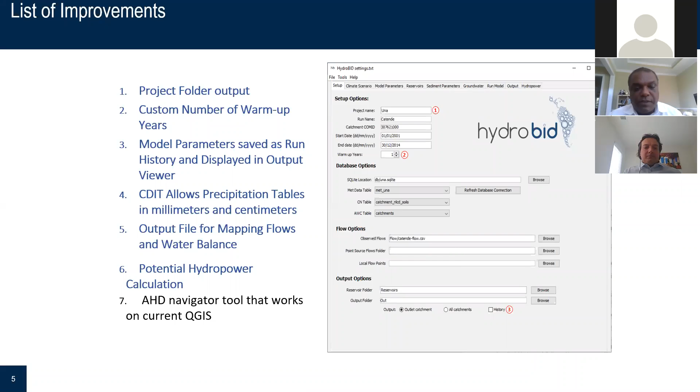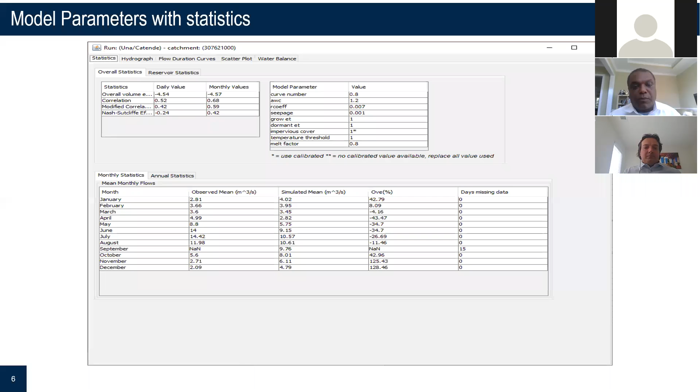The third one is the model parameters that you have run for one output. We didn't have a way to save it before, but now we've developed a method where you can save your parameters and see it with the statistics those parameters produced. So you have your model parameters, the statistics, and the graphs together, with every piece of information saved for you. This is one of the improvements that will help you in calibrating the model and following up on the results and the parameters.

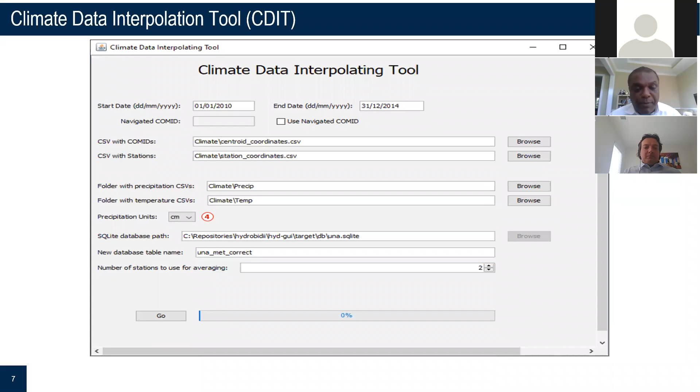The next improvement we did is in climate data interpolation. Remember, you collect your rainfall and temperature data. One of the things we wanted to do is allow different units. Initially, HydroBID forced you to use precipitation only in centimeter units, but now you can choose depending on the data you have. If your data is in millimeters, you can choose millimeters, and internally the model will convert that into centimeters for you. This is a good tool that helps facilitate inputting precipitation data.

The other improvement we did is in the output: some of the data can now be summarized for each catchment. For example, mean annual rainfall or mean annual runoff can be summarized for the entire year or the entire simulation into an average, and this can be graphed. In this version of HydroBID, these outputs can be displayed, showing changes in runoff or changes in precipitation plotted spatially onto your watershed. This can be done either using QGIS or the tool that Enrique will describe as soon as I finish.

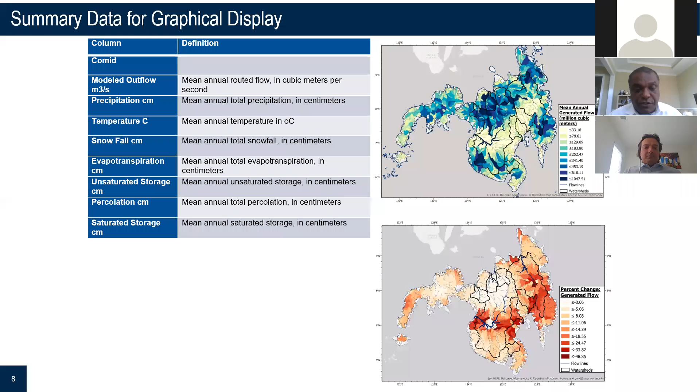The most important development we have done is that for each catchment's flows, that flow can be interpreted into hydropower potential generation. For this, we use a simple formula of power, which is a multiplication of flow and height, where height is the drop of the water, then adding parameters like gravity and m and eta components.

We've added this as an optional tool, so you can choose to add it or not. After you run your model for all the catchments, you can look at the table that calculates the potential for hydropower. This is a simple estimate of hydropower generation by river, with or without any reservoir, using the water that passes through a section and the drop H to calculate the power generated for each catchment. These are the significant improvements we have done.

On the other hand, also on QGIS, we have updated the AHD navigator tool that can help you navigate your catchments on any QGIS version, the latest QGIS version. And in parallel, we have developed WaterAlloc, which Enrique will explain, showing some of the improvements.

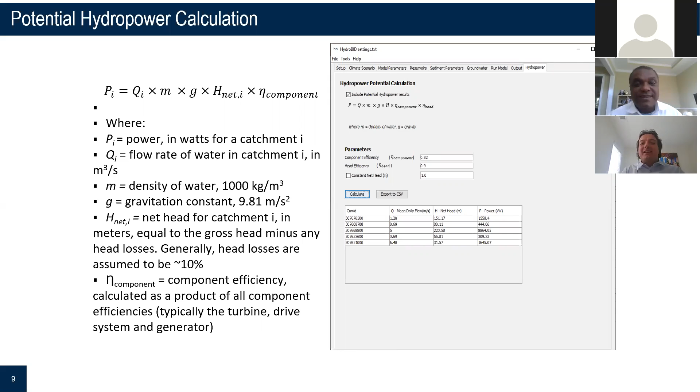Enrique. Yes, I want to introduce Enrique. I missed the introduction of Enrique. Se me olvidó presentarles a Enrique. Enrique es el creador.

He's the creator of one of the most important components contained in HydroBID, and he really changed the concept for the tool, giving it a more operational perspective. So Enrique, you have the floor.

Thank you, Mauro. It's a real pleasure for me to be here with you today to share some of the advances that we've achieved with WaterAlloc.

As many of you saw yesterday, we talked about what WaterAlloc is, but I'd like to remind everybody and bring everybody up to speed just in case you weren't present yesterday. WaterAlloc is a model management system that incorporates HydroBID with MODSIM, which is a modeling program used in many areas of the world for reservoir management applications, water distribution systems, and management of river basins.

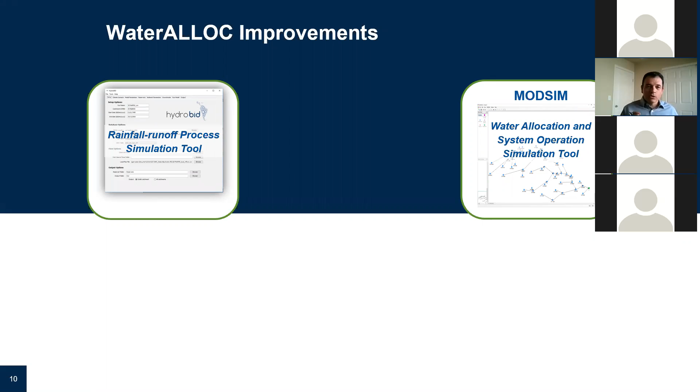So what we created in WaterAlloc is to basically achieve more connectivity between these different modeling programs. And what I wanted to describe is as follows.

The tools that we've improved since the last time we presented this tool include file management capability, some modeling tools, and more tools to calibrate the watershed and basin models. We also improved the output visualization of the results. There's a module that we incorporated that is a hydroeconomic module, and it'll appear in one of the subsequent slides.

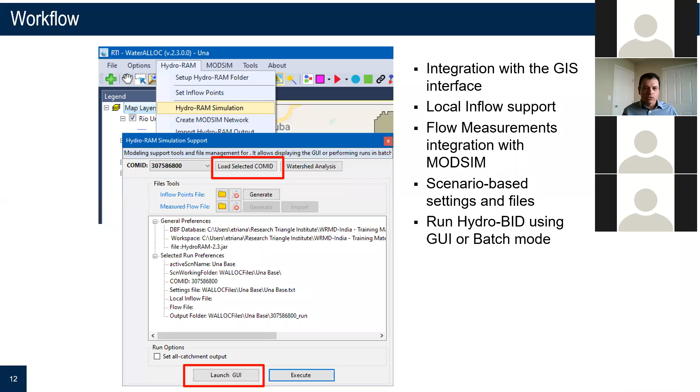The first part of the workflow that we implemented includes integration with the map that we use in WaterAlloc with the HydroBID interface. So the model now makes it easier to look at different subcatchments, and we can start the HydroBID model within that context. We created more automation power for this, and it's a lot easier to do compared to what we had previously.

Likewise, we've implemented the ability to move the data from the map to HydroBID, and now we have more visualization capability of the map based on the output of the hydrological model. We used to use QGIS, and now we can enter this directly on the map, and we can see an example on the next slide.

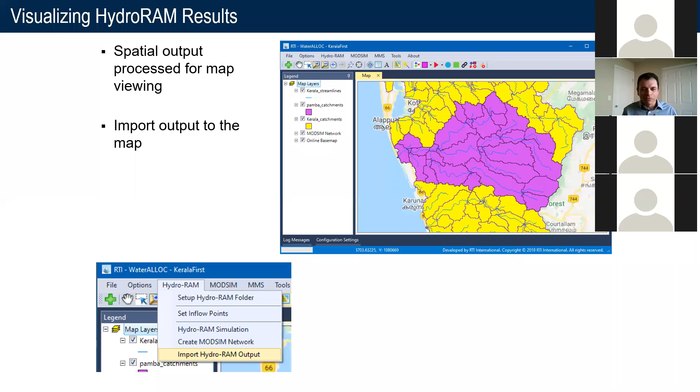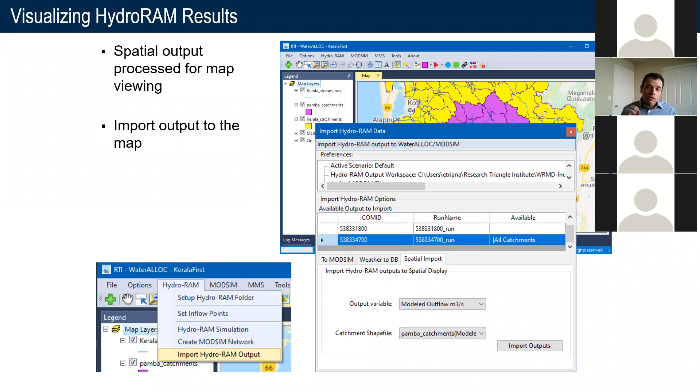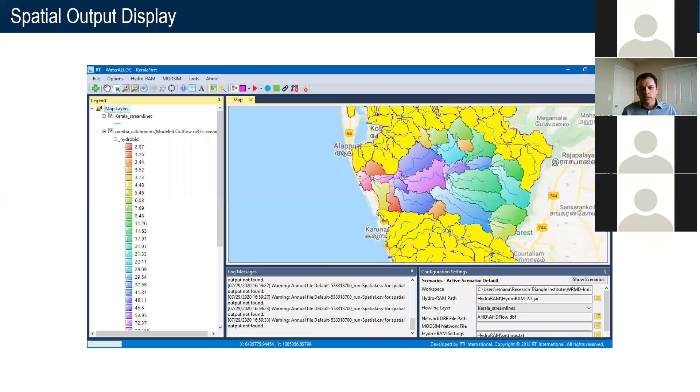So we can see a window that allows us to select which elements of the HydroRAM results we want to visualize on the map itself. The next slide shows us how we can use a color scale with different magnitudes of the results and visualize from a spatial perspective the HydroRAM results for each sub-basin, giving us a better understanding of the macro dynamics involved in our basin analysis.

With these tools that allow us to introduce HydroBID results into the MODSIM model, we've also developed a series of tools that allow us to perform calibration with operational flows. In this way, we can compare the simulated flow at one station with the HydroBID hydrology and some of the assumptions we've identified for the basin, including reservoirs and other existing water sources. We can look at this from the operational flow and observed flow standpoint, and subsequently calibrate this data to compare operational flows with measured flows, which is advantageous when we try to calibrate.

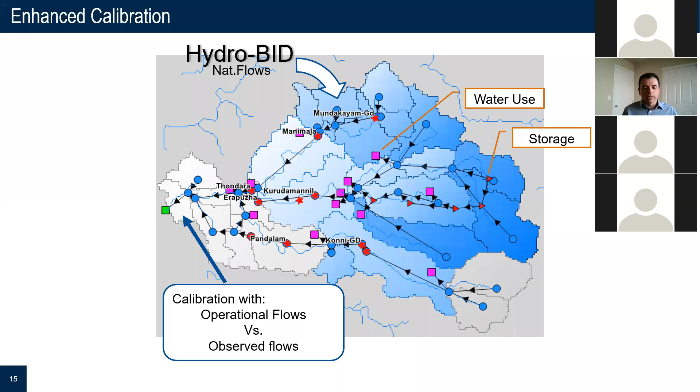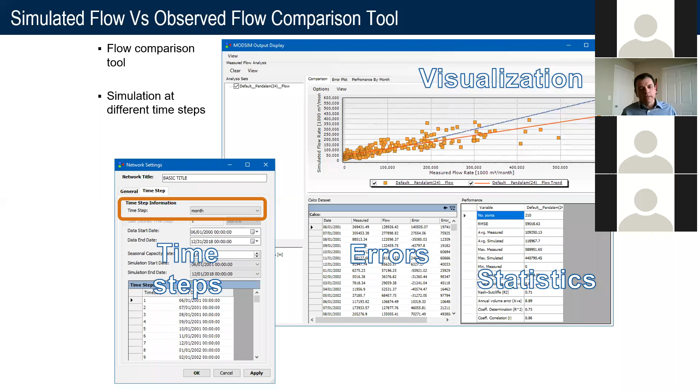Basins that have been worked on extensively in the past were much more difficult to engage in this type of calibration. So what we did was develop a number of interfaces that allow the user to analyze any errors in the data and visualize how the time series simulation is behaving compared with the actual measurement. These tools have allowed us to improve the manner in which we look at calibration flow through the use of HydroBID tools and also the MODSIM tools to calculate operational flows.

The last part I wanted to talk to you about, regarding the improvements we've made in the program, relates to this hydroeconomic model. It's a model that can be activated within WaterAlloc, and it allows us to introduce variables to estimate, for certain crops, the economic value they have based on the availability of water at any given point in time.

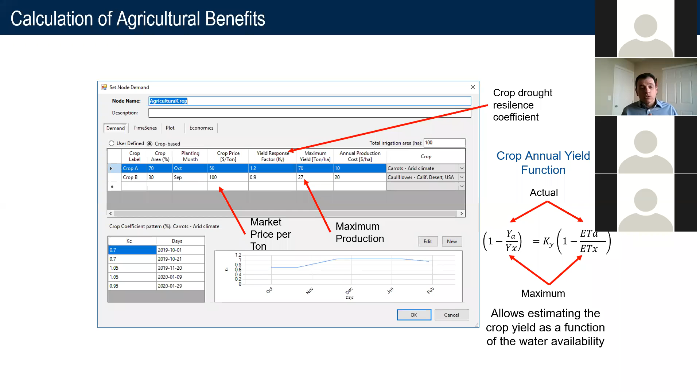We see an example of the user interface in which we introduce factors and coefficients estimated for each crop type. This allows us to estimate the resilience of that crop's production based on the availability of water, and then we can come up with a yearly yield average based on the available water.

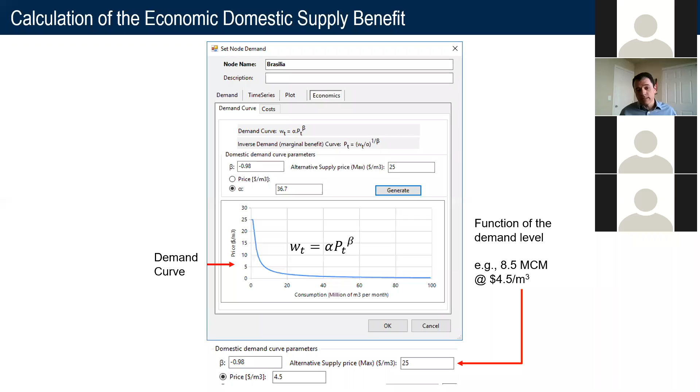We also have some equations that allow us to assess the economic benefit that we could derive from supplying water at a municipal level. This involves different parameters that allow us to use this demand curve, and through it we can assess the economic benefit and also the economic impact of not having sufficient water to satisfy municipal demands.

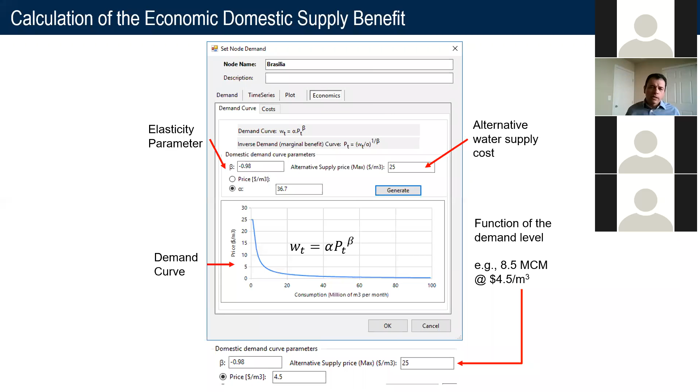This hydroeconomic model allows us to enter and use these different parameters to assess the demand we're simulating, and it also allows us to simulate the availability of water on a per month or even per day basis. Based on these parameters, we can then estimate the economic value that a particular water distribution would have, based on the different demands the system poses.

The model allows us to add these economic values and benefits on a yearly basis based on water distribution, and it also allows us to compare benefits with costs. We can do different types of system-wide analysis based on different infrastructure alternatives or water availability. For example, if we have climate change impacts and the water distribution differs in quantity and time, we can conduct analysis to see how these changes affect the balance in the economic framework of the system.

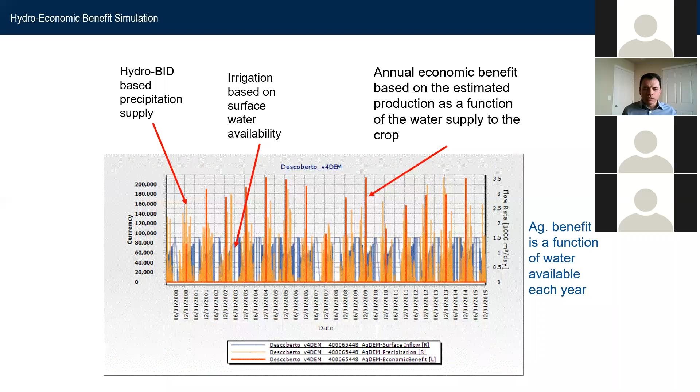Next, I think that was the last one.

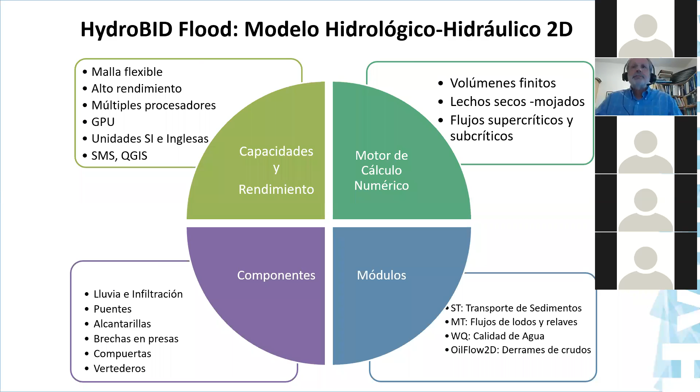It works with finite volumes. It can work with dry beds or wet beds, supercritical and subcritical flows in some mountain areas, for example. It also has a number of modules that includes the sediment transportation module, the flow or the mud and tailings flow module, water quality, as well as crude spills.

The main applications for the HydroBID flood model includes detailed evaluations for flooding that allow us to also study river dynamics based on sediment movement. It allows us to determine the extent of the affected areas, calculate the speeds or velocities and depths of the flow. It allows us to assess the efficiency of mitigation structures.

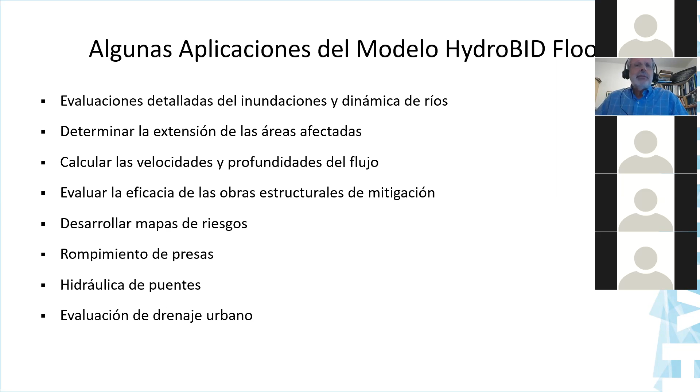We can develop risk maps, analyze any dam breaches, hydraulic components for bridges. It also allows us to automatically create the risk maps, as I stated. We can look at dam breaches or bridge failures. And we can also conduct analysis of urban sewage and drainage systems.

When we talk about the evaluation or assessment of urban drainage systems, until very recently it was based on surface flooding analysis, and it was treated as a secondary item. This was due to the fact that the model didn't have a component that addressed that specific issue.

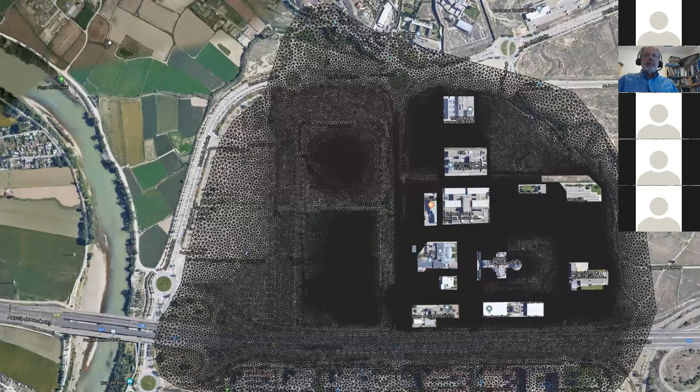So it was based on this calculation matrix that you see here, and we can establish the entire topographic structure of the surface of the entire area. And if we have rainfall, we could also see infiltration. But when we talk about runoff, it was only based on surface runoff.

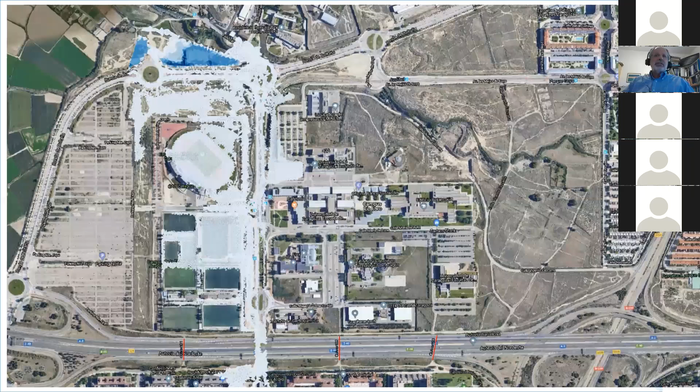So this is an outcome of this example that came out of the University of Zaragoza. This is a picture, an aerial photo of the University of Zaragoza. But as I was stating, we would set aside the secondary collector portion of the drainage systems or sewage systems.

For example, anything related to collectors or drainage lines that collect all of the surface water was completely ignored.

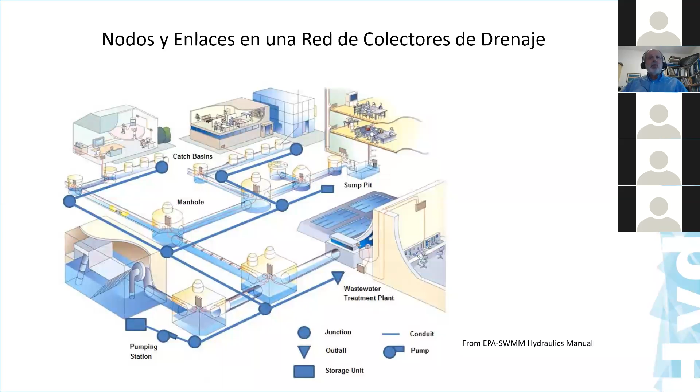And therefore, we couldn't really use the model as a tool to design these types of structures.

So what we've introduced with the support of the Inter-American Development Bank is a new module for the HydroBID Flood model, which is the UD, the urban drainage or sewage module, which was integrated into the SWMM module, which calculates the traffic in the collector network.

But when we use the SWMM model in conjunction with the HydroBID Flood model, this allows you to do the overall run only once, instead of having to do it separately with each model.

Some of the main capabilities of this urban drainage flood model includes the analysis of surface flooding with HydroBID Flood, but at the same time you could analyze the traffic in the drainage network with the SWMM model.

And so you can see what's happening with the flows in the various collectors, and the networks are of unlimited sizes, and you can conduct a simulation of the exchange of flows between the underground drainage system and the surface water flows.

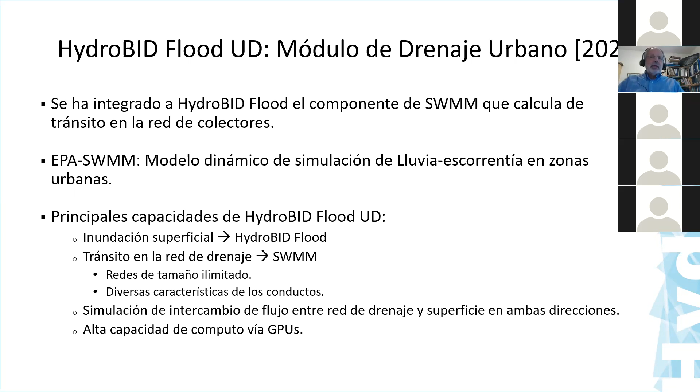This is supplemented with code that allows for much faster runs through the use of GPU hardware.

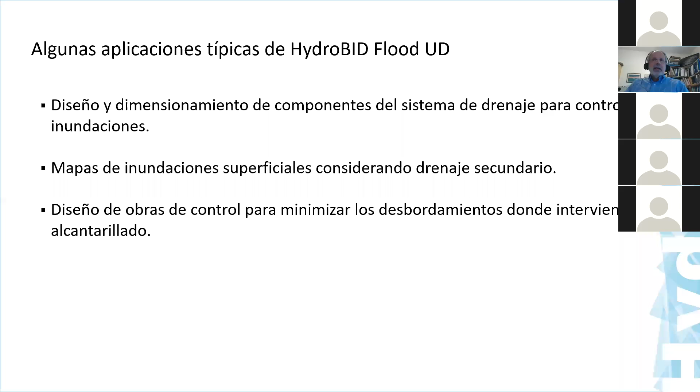Some typical applications for this new model include the design and dimensioning of components for the drainage system for flood control, and we could do this for both surface and underground applications. We also can generate surface flooding maps considering secondary drainage systems, and we can also design control infrastructure to mitigate any overflows where the sewage systems are involved.

So this was not available previously.

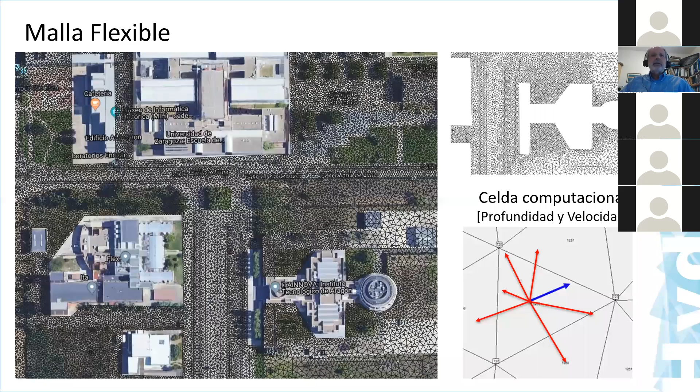HydroBID Flood is primarily based on the design of a flexible matrix, and QGIS provides users with all the tools to create this matrix. It can adapt to the irregular profile, and the basic computational model is based on triangles. For each triangle, we calculate the velocity and depth of the flow in real time, giving a complete vision of the flood.

This matrix can adapt to existing surface topography and other elements. The graphic user interface is based on QGIS, using the most updated version, so any type of data entry and output is conducted through this environment.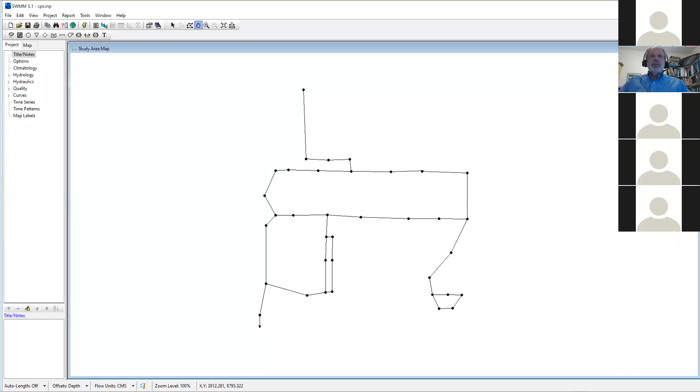Nevertheless, when we talk about the drainage network, this is done through the SWMM model. This allows users who already have the SWMM model, many cities already use it, to incorporate that data without making any changes. HydroBID Flood can read the data directly from the drainage system and incorporate it into the surface area matrix.

The capability of using graphical processing units, which are very high performing tools, is an intrinsic component of the model, and it allows us to maximize the capability for cards that can run the model up to 700 times faster than the non-parallelized version. So for larger applications in larger cities, this module with the GPU is highly recommendable.

At present, we're about to begin a pilot in the city of Santa Fe, Argentina, where we will be using this module in a certain portion of the city.

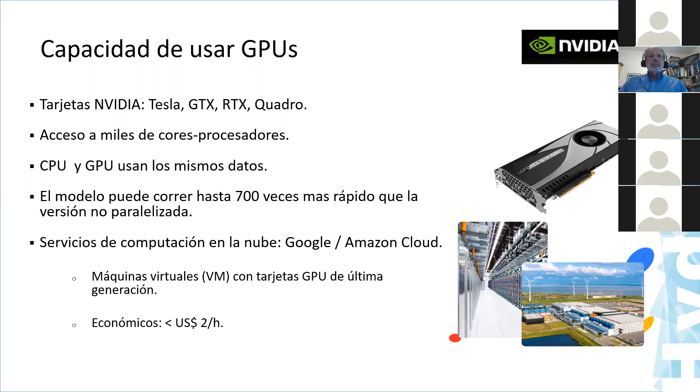As I was saying, we're working with the most recent QGIS version, right now it's 3.16. For implementing a HydroBID Flood model, first we put together the whole SWMM structure within the user interface itself for EPA SWMM, which is free access. Then we use HydroBID Flood and QGIS to do the superficial part, and this communicates automatically, so the model runs in an integrated fashion with both groundwater and surface water.

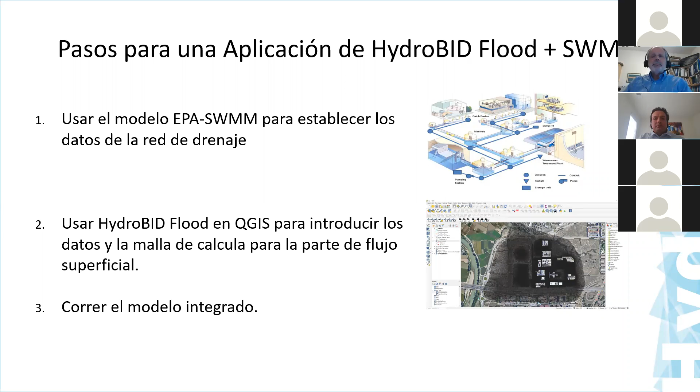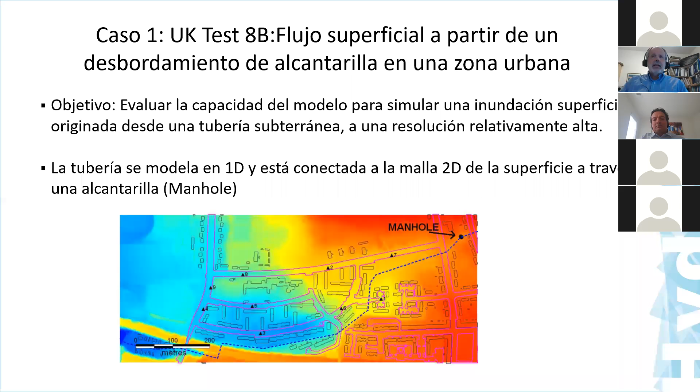Next slide, please. I'm going to talk to you briefly about a test case in Glasgow, where there's an underground sewer and surface flows. This is the sewer, and you can see there's overflow at one of these points of the underground pipe. This pipe overflows and the water goes to the surface.

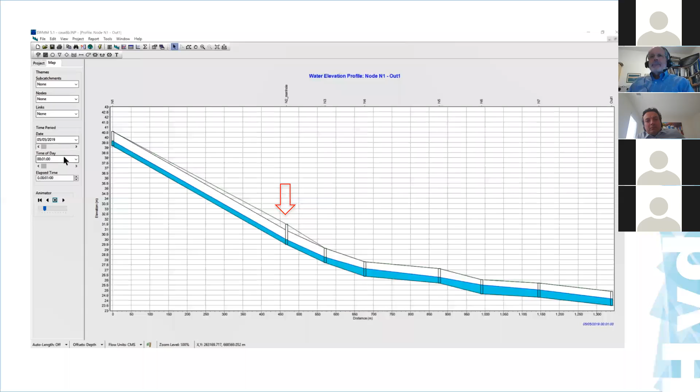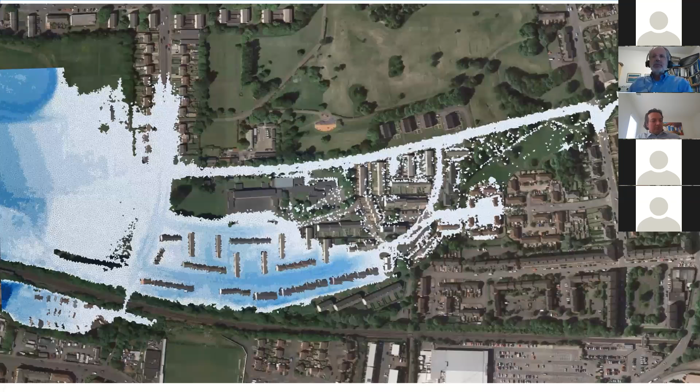Next slide, please. Once the water flows to the surface from the underground sewer, in this case specifically, there is flooding in a housing area you can see in the image. So the model allows us to establish a new design in order to improve this situation.

In conclusion, what I wanted to explain was the integration of HydroBID Flood with the SWMM model, which is a possibility for any project one would like to conduct in the region. As I said, we will start a pilot project in the city of Santa Fe, and we are very anxious to get this started. We think this will have a big impact in the city.

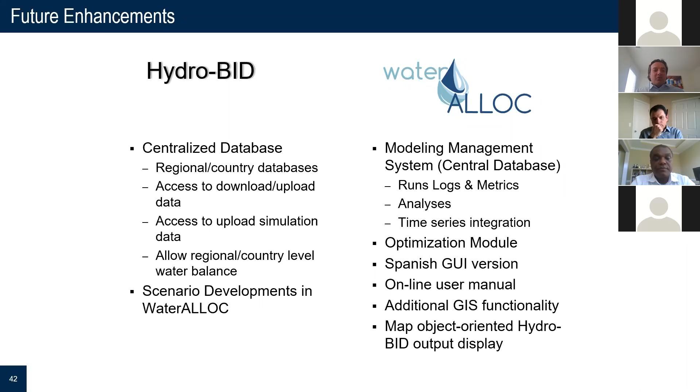So I believe that that is a very important thing to know, and there's no stopping it. I wanted to talk about the same thing with Reynaldo. Apparently HydroBID Flood leads to many questions, and it will allow us to make tremendous progress. I'm very curious to know what is being envisioned, what new things are coming down the line with HydroBID Flood. How far do you think this can go?

Sure, well, there's a series of proposals that we have in mind that have actually already begun. We've started working on some prototypes, and I think one of the most interesting ones to me, because of how useful or impactful it might be when it comes to evaluating infrastructure works, is using a detailed hydraulic model of this type, including cost analyses

and damage due to floods. Currently, with HydroBID Flood, you can run a simulation on existing conditions in a river, and you can look at how this river might flood an urban area. You can also use this model to assess proposed works that are to be built in order to mitigate this flooding. But currently, there is no way, at least no automated way, to run an economic analysis to compare alternatives when it comes to these works to determine which one might be the most optimum one economically speaking for

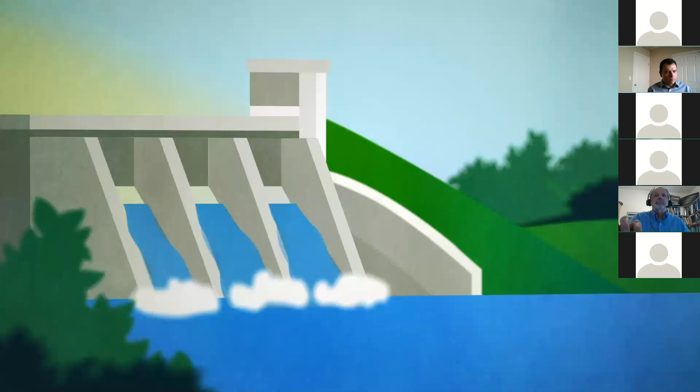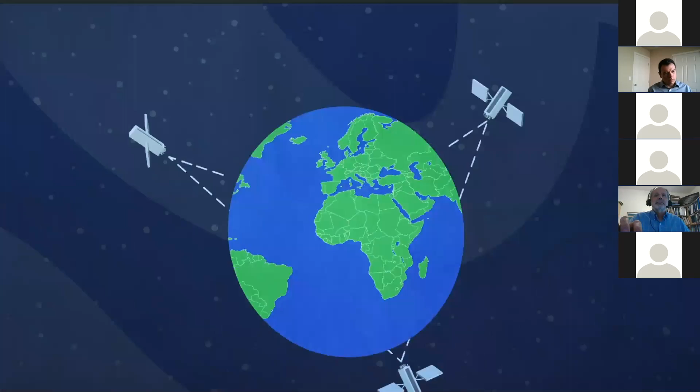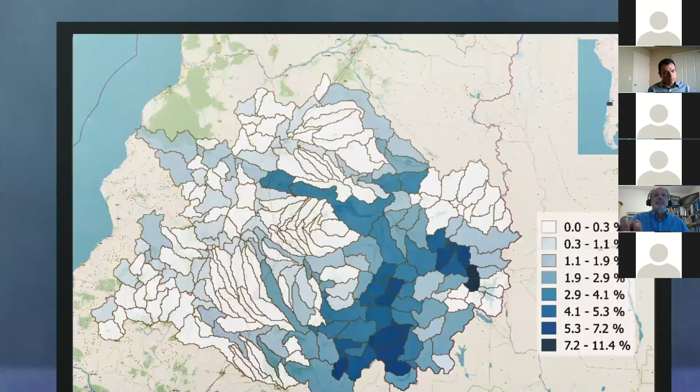Would you like to contribute to better water management? HydroBID is a high-tech digital tool created by the IDB to support efficient planning and management of water resources. This technology is available to everyone, and you can learn to use it. Around 1,400 people in Latin America and the Caribbean have trained using the online course, and over 23 countries in the region use this tool. Learn to use HydroBID and conduct hydrologic simulations from your own country. Experience virtual learning in an active and practical way with a student-tutor relationship from anywhere. There are 4 modules covering the detailed use of HydroBID during simulation, the use of the model, analysis, and results. Today is the first step to becoming part of decisions for the future. Sign up today.

A lot of people have already taken this online course, so sign up. It's a very interesting tool, good for learning about HydroBID. We're going to improve it and broaden it. There will be expert tutors available to mentor you throughout the process, and we can talk to one of our guests today about this, because these people have been making the most of it. We'll move on to a very important topic.

We know that progress in many areas having to do with water resources starts from teaching and learning. And in academia, there's a huge amount of knowledge available that is useful for the work we do in developing these tools.